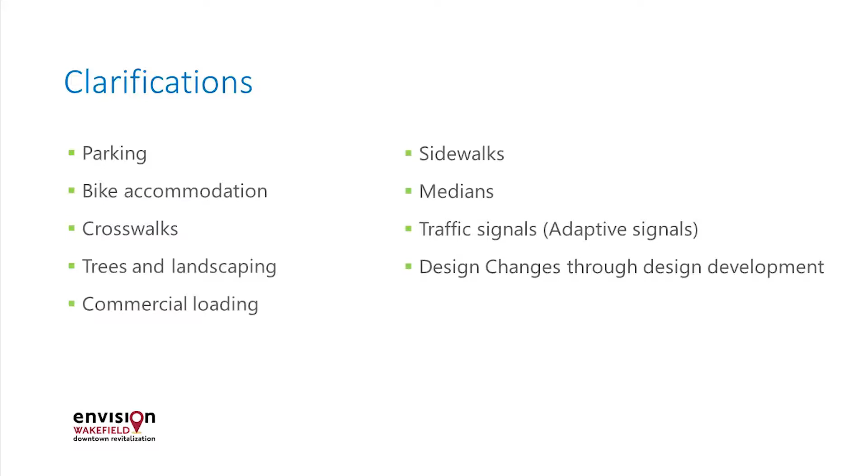We also wanted to update folks in terms of crosswalks. I think there was a little bit of a misconception about the idea of having the wide crosswalks that are out there today. In many of the locations, we're actually shrinking the size of those down to make it much safer for the pedestrians as well.

Trees and landscaping, again, this is very conceptual, but we've actually gone through the plans. I think that we're working really hard to keep as many of the existing trees out there as well, so it's not going to be a clear cut of the trees, as many people I think had thought along the way.

Commercial loading and unloading, if you think about all the businesses up and down Main Street, we've had a couple of conversations with the business owners. That detailed analysis about where loading bays would be and parking spaces for trucks and so forth, that really comes in the next round of the design process. But we're going to be working closely with the businesses to figure that out in much more greater detail.

Sidewalks, a little bit of misconception there about are we basically taking out all the sidewalks and making all of them smaller? Actually, in many cases, we're making them wider and be able to accommodate a whole range of uses that we'll show you in the videos as well.

There was a little bit of misconception about medians, thinking that we're actually not providing any. We've actually increased 3 or 4 of the medians going up and down the corridor, and we'll show you those in the videos. And then wanting to make sure that beyond the physical improvements that you might see in the sidewalk and the curb cuts and the aesthetics, that the traffic signals and operations, especially along Water Street, are really going to be enhanced to deal with the flow of cars coming through this whole area.

And then really talk about the design changes, because we've heard a lot over the last few months. You might see a lot of the same drawings tonight. That's actually intentional because we're gearing up towards making a whole series of changes. And tonight we really want to hear from you about other input items that we should be thinking about as we further advance the design.

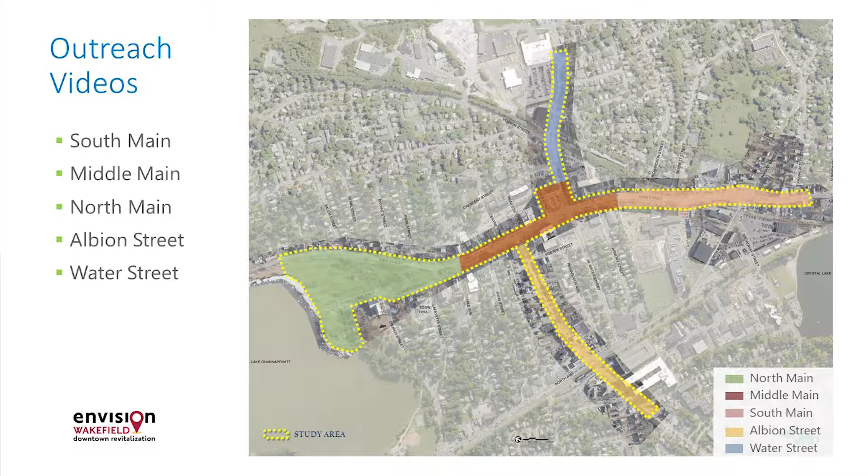Sure. So the study area, does everyone understand the graphic? It's very colorful. This is the junction right here, this is North Ave and Nahant Street. This is Main Street. So Main Street, the project starts at Franklin Street, this is the Dunkin' Donuts. Goes along Main Street up to Water Street. It extends up Water Street beyond Vernon Street to the Shaw's driveway. Along Main Street, it goes and continues up to Salem Street, which is about right here, and also Albion Street, which is down here. It goes to Gould Street. This also includes some of Church Street, some of Common Street, and then Lake Ave and Spaulding Street.

So just as they're doing their thing, I just wanted to really reiterate the number of meetings that have been happening so far with this project. The focus group meetings were meetings that we held every Friday morning, every other week for a couple months. So there was about 8 meetings. And the focus group, there were representatives that represented different people along the Main Street corridor and Albion Street, like the Friends of Lake Quannapowitt, the senior center folks, the DPW and the emergency folks. So there was everyone that actually gave their input on the design development. We would throw out an idea and we would get their input. It was terrific.

The public meetings, this is the 4th one that we've had so far. And to be honest, there were about 16 meetings as part of the public outreach and the public process for this project, which is really interesting because we started about January 1st. So there was a lot of work done with public outreach for this project. It really is outstanding how much the town has tried to be transparent. All of the media that you see tonight, except the blank screen, is on the town website. And also all of the information presented at all of the other 16 meetings is also on the town website under the Complete Streets web page.

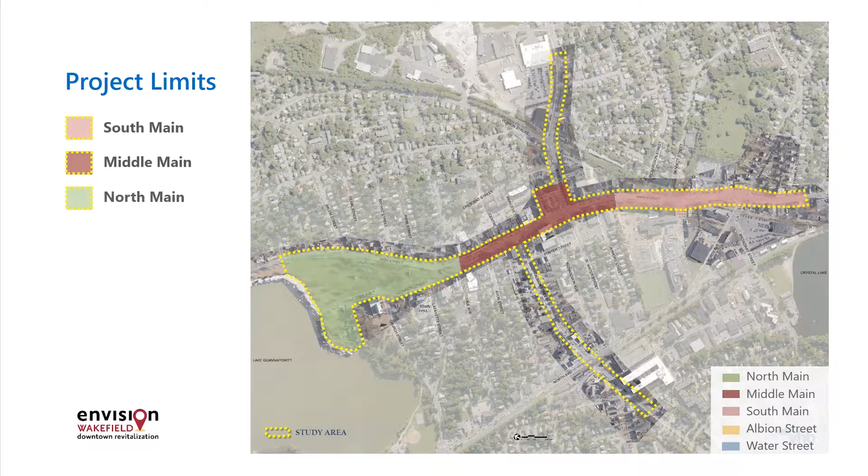The town of Wakefield is excited to share the conceptual streetscape and roadway vision for the heart of our downtown. Working closely with stakeholders, businesses, and residents at a series of community forums, conceptual plans have been created for South Main, Middle Main, North Main, Albion, and Water Streets. Keep in mind that these designs are a framework, think of them as the bones of the project. As the design process continues, elements like sidewalk and roadway materials, types and styles of lighting, placement of bus stops, and other details will be determined.

This is the southern end of the scope of the Downtown Revitalization Project. We have the intersection of Main, North, and Nahant on our right, the Galvin Middle School in the center, and the intersection with Water as you travel north.

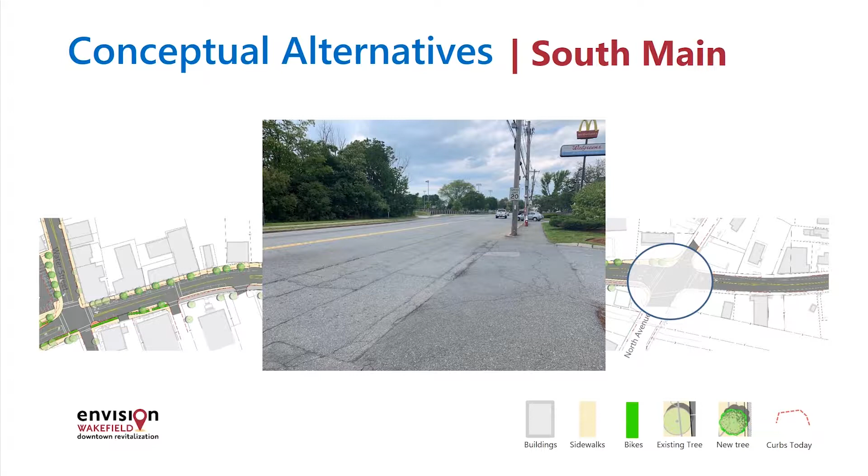Many residents commented that the Nahant Street intersection was the gateway to downtown, but that it currently lacks the character one expects when they come to Wakefield. There's an opportunity not only to improve the geometry of the intersection, but also introduce choice plantings, lighting, and streetscape elements to beautify the area. Those types of selections will be made in the next phase of design.

Throughout the feedback process, residents have been clear that the safety of the middle school students is a top priority. Over the most recent 3-year period, a total of 41 crashes occurred along this section of Main, with 3 crashes involving a parked vehicle and 1 crash involving a cyclist.

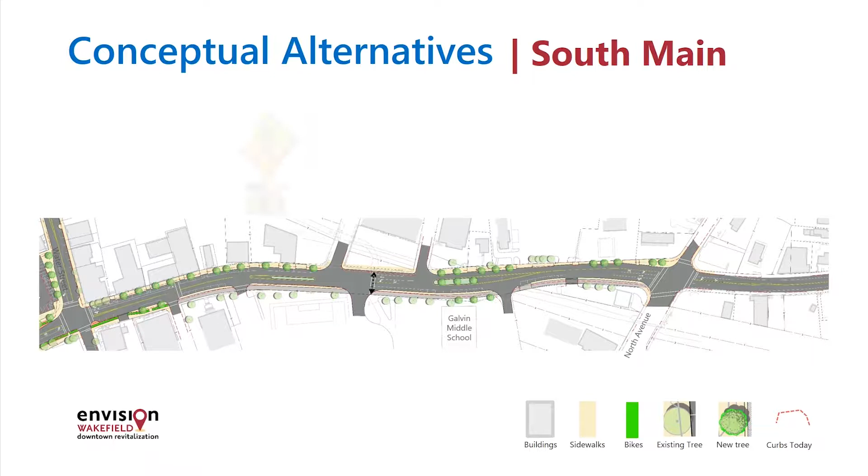With safety in mind, this plan proposes extending the sidewalks here and introducing medians. The medians would be designed to reduce the wide pavement area in front of the school and add more green space to make it more appealing. This concept also shows 2 crosswalks that could be installed with rapid rectangular flashing beacons that would alert oncoming traffic when their buttons are pushed.

An exciting development in this section of Main Street is the Wakefield-Lynnfield Rail Trail, which will begin in the area of Richardson Street. A small parking lot will be created there as part of that separate project. It's important to envision the future of this area and how it will be used. In this design, a separated shared-use path would be installed along the middle school so that cyclists can travel off-road to North Ave. Providing a shared-use path for cyclists can reduce conflicts between vehicles and bikes, improving safety for all roadway users. The path would be 10 feet wide, the same width as the rail trail, and would function the same way, providing access for walkers and bikers.

North of the middle school, a separated bike lane is proposed on the west side for bikers traveling south, and a bike lane on the east side for bikers traveling north. A bike lane is proposed for this short stretch of Main Street because of the needed right turn lane going onto Water.

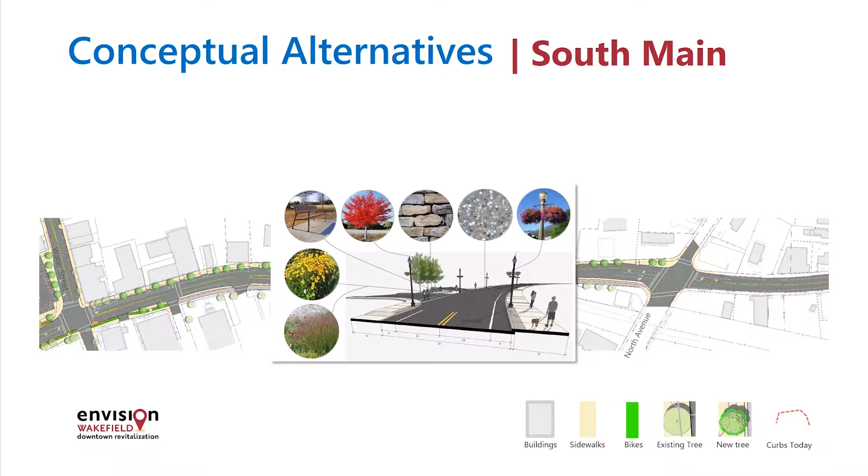Sidewalks on either side could be reconstructed with new materials, streetscape elements, and street trees. These selections would be made in the next phase of design.

A traffic study found that the angled parking at the intersection of Main and Water is often used as an illegal traffic lane for drivers looking to avoid traffic stacking on Main Street and turn right onto Water. The design suggests that these spaces become parallel spaces for that reason.

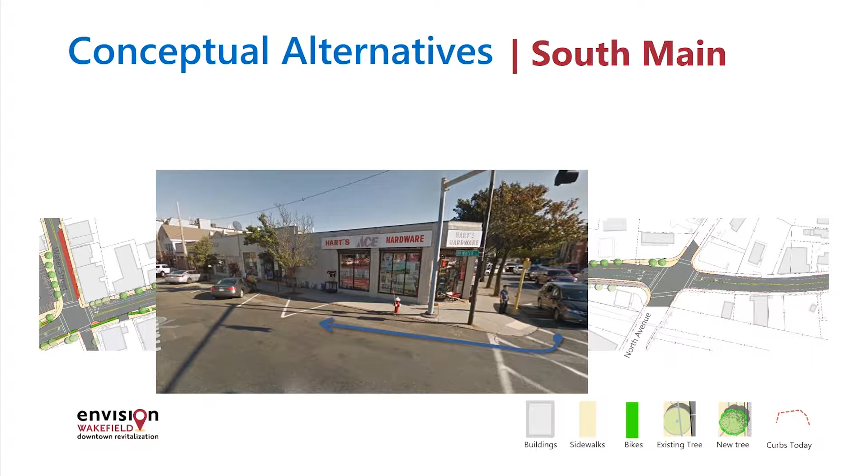The angled parking as one makes the turn from Main onto Water Street caused multiple crashes over the past several years due to cars backing out of the spaces without a proper sight line into oncoming vehicles. To minimize the hazard, these spaces would be converted to parallel spaces. However, a reconfiguration of the lot across the street would compensate for the loss of Water Street's angled parking.

Let's look at it more closely. The red dotted lines you see are existing curb lines. Some of the parking spaces and parking aisles within the lot today are substandard.

With the reconfiguration, you'll notice many changes here and an adjustment of the traffic flow on Smith and Lincoln Streets. This plan would not only improve circulation, but potentially improve safety within the parking lot. The new configuration would also provide additional spaces, resulting in a net gain of 2 spaces over what exists in this area now.

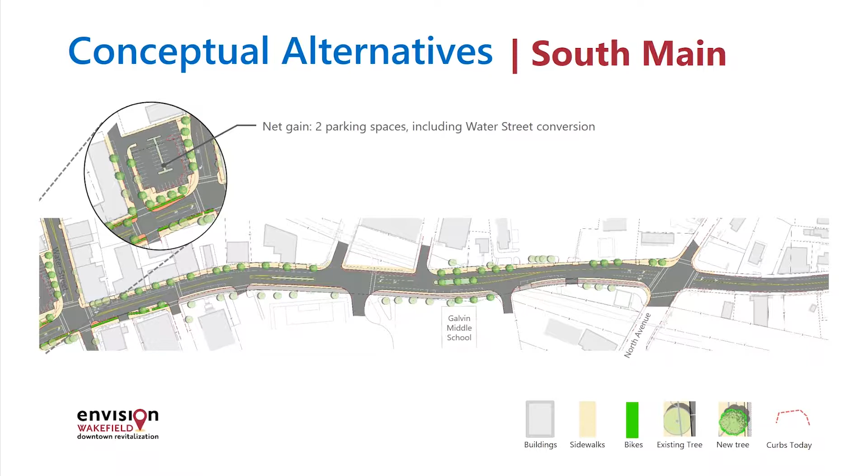One of the things that we did here was add medians, or rather, we were thinking about actually reducing the amount of pavement out there. Just to reiterate, there is a median that's going to be landscaped right at the middle school, and also a smaller median that's going to reduce the amount of pavement that's out on Main Street.

You are currently looking at Middle Main Street. Just to orient you, on the right side of your screen is the intersection of Main and Water. This is the Smith Street, Water Street parking lot. Continuing northbound, you'll see the hiker statue and rockery across from Crescent Street, and further north beyond this graphic, you'll be at the lake.

Part of the design process is planning for the future of our downtown and conceptualizing how it could be used. As you may know, the Wakefield-Lynnfield Rail Trail, which is a separate project, will begin just south of here across from the Galvin School. It will cross Water Street at its intersection with Vernon. This will bring many modes of transportation to the area, and this project looks to accommodate all of them safely.

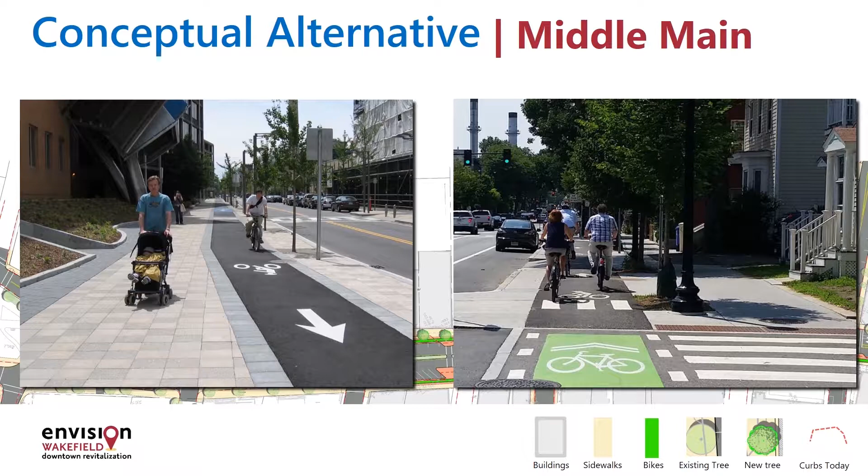On this concept for Middle Main, the lime green strips indicate where separated bike lanes could be located. They'd be at the level of the sidewalk, away from the roadway and parking stall, and also adequately separated from the sidewalk itself. Here are examples of how other communities incorporated this type of lane.

As the road tightens here, the current angled parking would need to be replaced with parallel spaces. Understanding the importance of parking on Main Street, we could make up for lost spaces on Center Street and Princess Street. By widening each road slightly and making them one way from Main to Union, it would create a loop. This would allow parking spaces to be created on each side of both roads.

This adjustment would not only make up for spaces on Main Street, but may result in a net gain of 2 to 11 spaces over what is present today, just in this specific area. The directions shown here are just concepts. Again, these are fluid, and the design is a dynamic process. The exact parking count would be determined when the plans are further along in design development.

You'll notice that angled parking is maintained elsewhere on Main Street, and keep in mind that angled parking could be added where it does not exist today further north. You'll hear more about that in the North Main video.

This project also envisions a better experience for our pedestrians and ensuring accessibility for all. You'll notice red dotted lines throughout the design; these show where today's curb lines are. Many residents shared their opinions that crossing Main Street was very difficult and not all crosswalks were accessible to individuals with disabilities.

From 2014 to 2016, 62 crashes occurred along Main Street between Crescent and Water. 10 of those crashes involved vehicles backing out of angled parking spots, and 7 were pedestrian-related crashes.

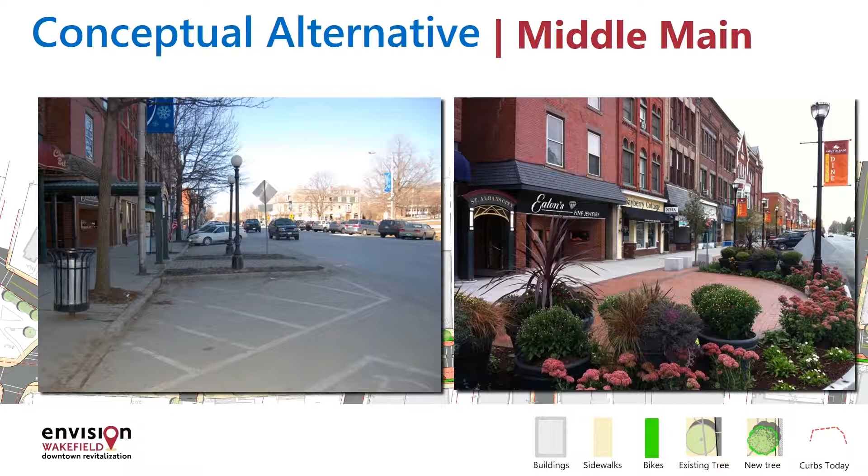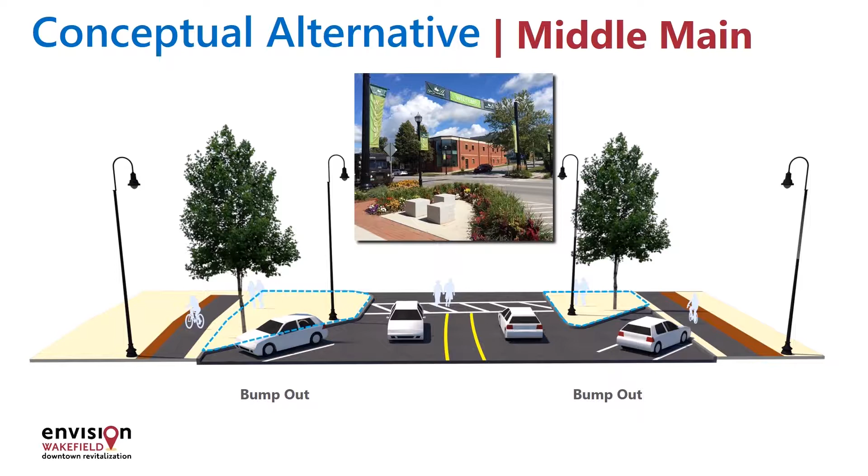Let's look at a cross-section view of the area highlighted in red. You'll see the sidewalks and sidewalk-level bike lanes, the bump outs, the angled parking featured in this area, travel lanes, and the tightened sidewalk. We'll discuss the Water Street parking lot in our South Main segment and changes to Common Street in the North Main segment.

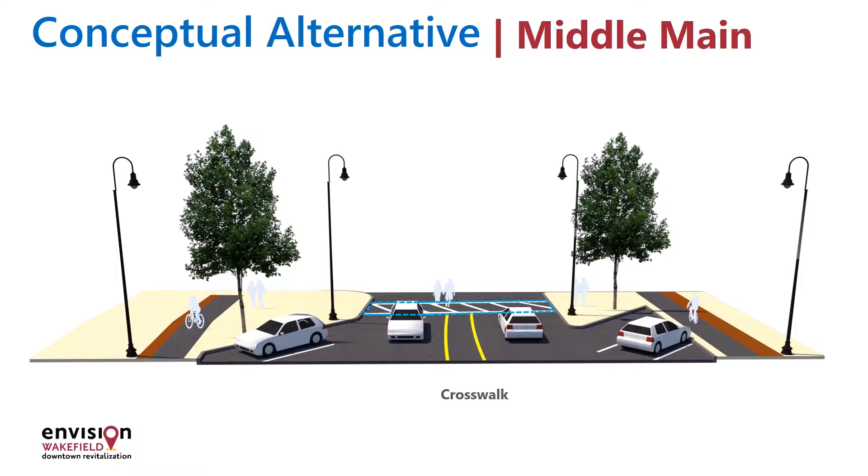So, questions or comments about the Middle Main section as we're bringing up the illustrative plan from a few seconds ago in the video? Can you go back to the plan? Go back to the plan. Yep. Yes, sir.

That's good. When I go to some of them, you have to back angle up. It seems like a much safer way to do it. Have you considered that? We're evaluating the use of reverse angled parking as part of this, yes. We originally thought of it. I think that was considered a number of years ago in Wakefield, and at that time, it wasn't really favorable. So we are reevaluating that right now.

In Somerville, and in other communities in this area, they use reverse angle parking. So instead of doing head-in parking with angled, they actually go beyond the parking stall and then back in. And has that been considered as part of this design? As I had mentioned, we're going to evaluate that to see what that looks like on this section.

Great. Let's go up in the front here. Yep. Hold on one second. I will bring the mic over. That way we can hear everybody and not have to repeat the questions. Excellent.

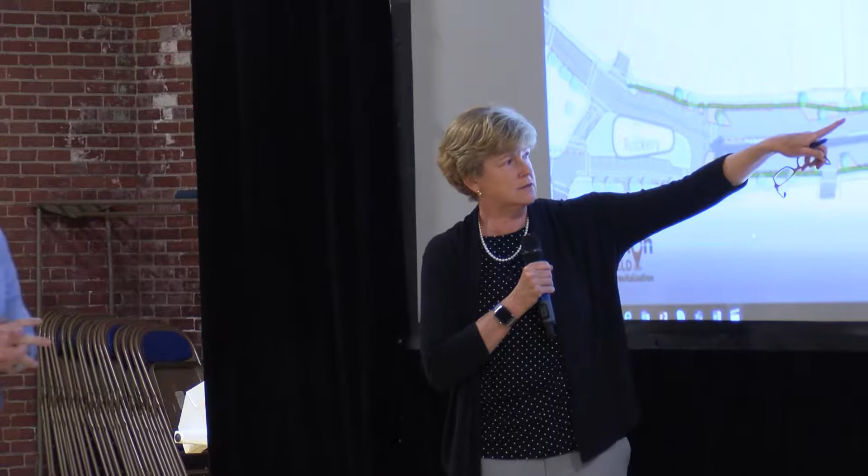So is this the area you're talking about, correct? On this side. Actually, you're gaining sidewalk. So right here is the existing edge, here.

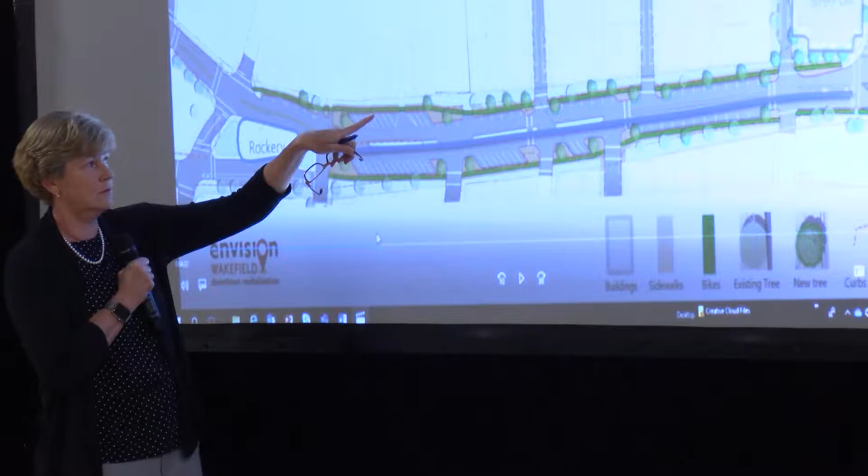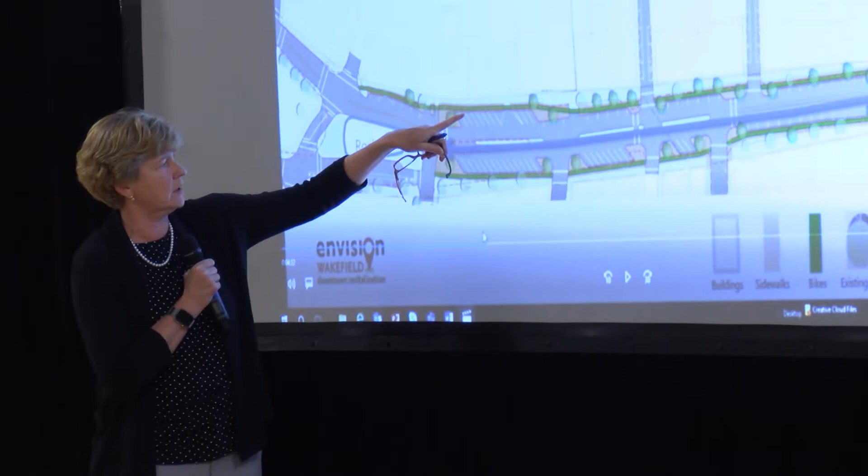So the dashed line is right where the angled parking, the edge of the angled parking, is — that's what we're proposing, right? The separated bike lane, as they call it, is 5 feet. So that's what you'd be losing, 5 feet.

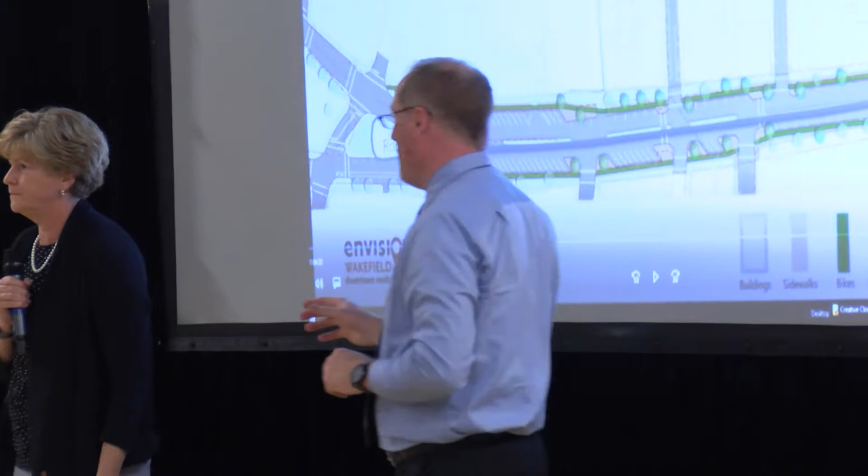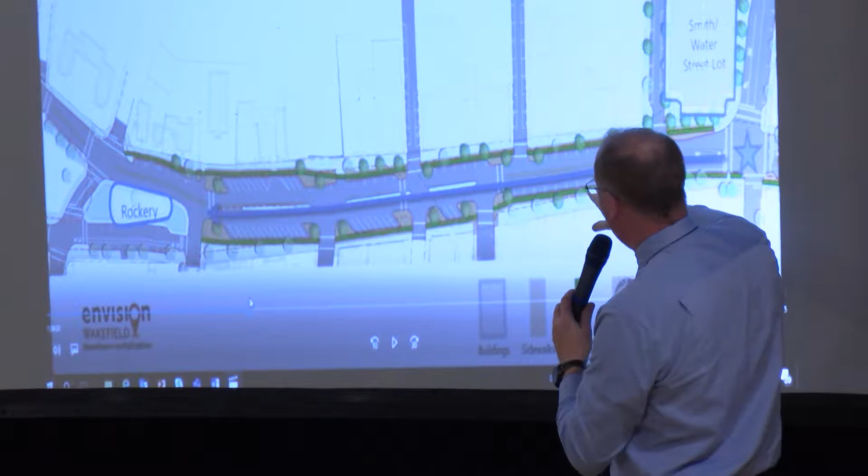I think one interesting opportunity we saw, because of how the whole Main Street area historically came to life, is that if you look at the width of Main Street down here, it's narrower than up towards the Rockery. So with our design hats on, that told us if you're trying to preserve the width of the sidewalks, put in the bike lanes, put in the angled parking, and maybe get a median, there wasn't enough room to fit everything.

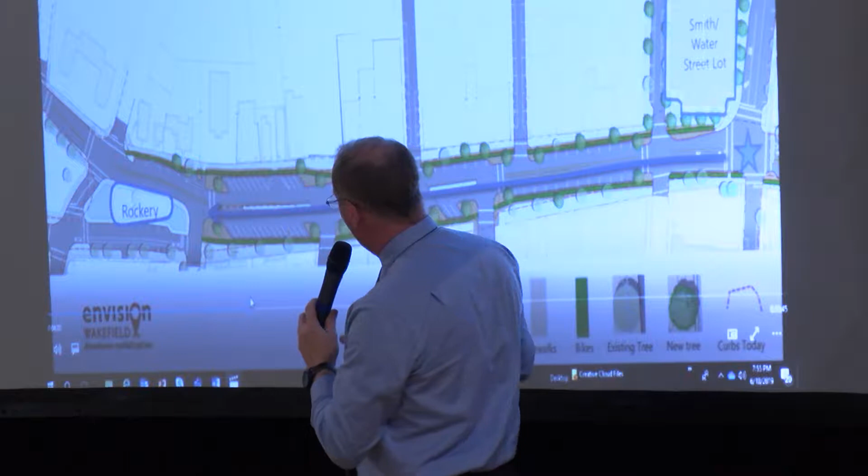As we go further north, we were able to extend the medians — you only have the one now, we've introduced a couple others — while trying to get the geometry of the bike lanes in and maximize the angle parking. There are actually parts of the plan where we've widened the sidewalk. I can imagine these spaces, and some of these bump outs in certain locations, could offer more pedestrian space and activity than what you have right now.

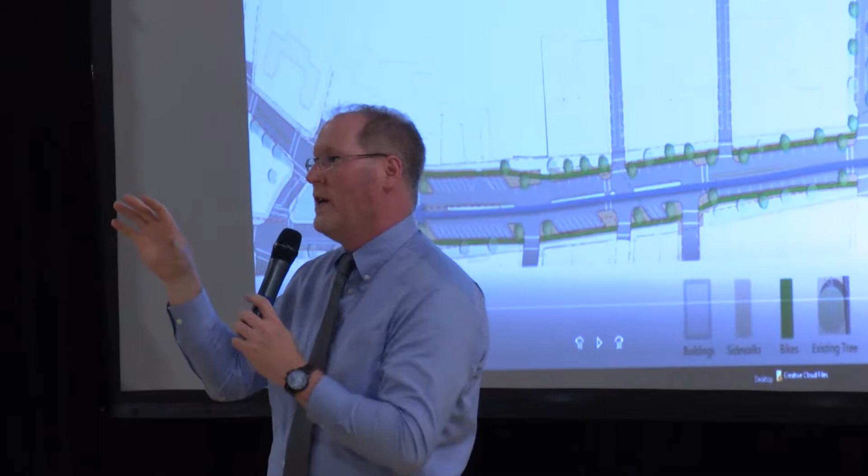When we showed you some of those photos from other places, we've yet to design what those can look and feel like — imagine outdoor dining, areas for festivals and activities. There are spaces in this plan where pedestrian activity is even increased from what's out there today. Just wanted to clarify that as well. Yep, let's go back here.

Elena Perry-Casellas: I'm a big supporter of the separated bike lanes, but I'm curious, now that the bikes are moved to behind the parking, at each of the side streets where the bikes are crossing and the crosswalks are crossing - two questions. One, is there a designated area for the bikes to cross and then the pedestrians to cross separately? And two, is the expectation that cyclists stop at each of those and look for cars, because cars are no longer going to be aware that someone's been riding beside them down Main Street?

I think it's a case-by-case condition. We would likely stop the bikes on the bike lanes at the crossing streets, but it really depends on how it's being used right now. And what was the second question? The crosswalks - the pedestrian crossing on the side streets is separated from the bike lane crossings.

You're looking at the northern section of Main Street. Here's the Hiker and Rockery Monument, and this is Common Street as you head north toward the lake. An adjustment of traffic flow and reconfiguration of the lane on Common Street could result in the addition of angled parking where it does not exist today.

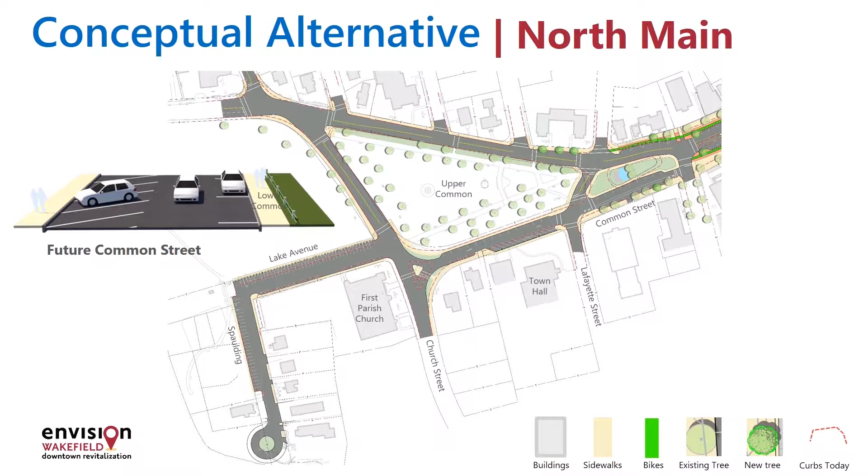Increasing accessibility and creating a safe space for all modes of transportation, vehicular and pedestrian, is a big component of these concepts. A sidewalk could be added along the upper common side so that those who park wouldn't bump their doors against the fence, and could travel safely on a crosswalk once they exit their vehicles. The angled parking and painted spaces along Common Street would result in 11 new spaces here.

You'll see red dotted lines on these plans indicating where today's curb lines are - especially obvious here by the Rockery Monument. Today this area is not accessible; there are no crosswalks, and the perimeter is extremely narrow. This design extends the green space and adds sidewalks while preserving the monument itself.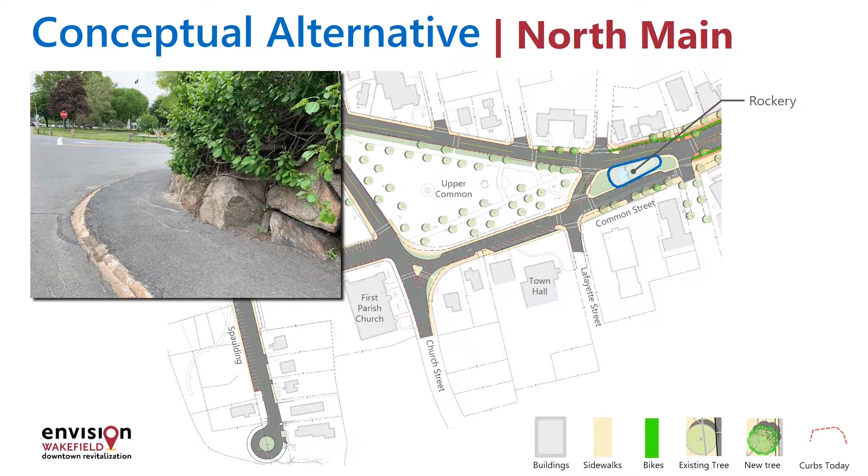This not only allows a greater pedestrian experience and brings the area up to standards set by the Americans with Disabilities Act, but the geometry of the intersection could be improved, easing traffic flow in an area of Main Street that's confusing to many motorists now. Emergency response vehicles would not be impacted by the proposed roadway configuration.

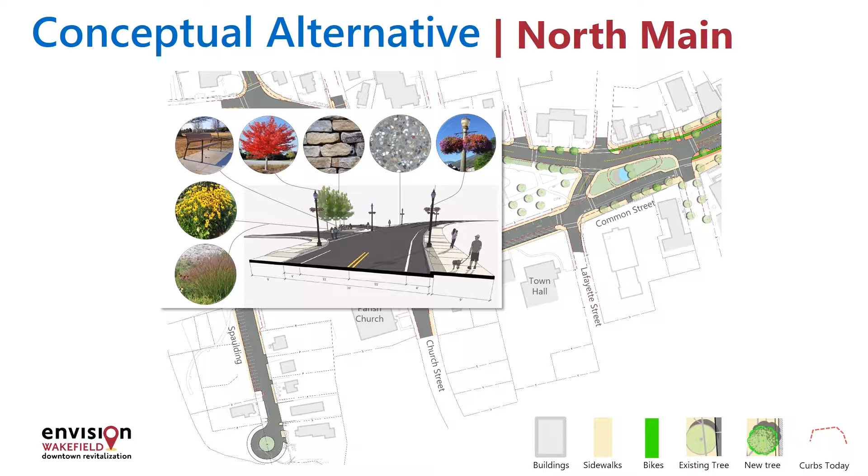The goal of this project is not just to improve the roadways themselves, but also to imagine possibilities for the future. Ideas within this area include the option to close Common Street for a special event or utilize the extended space for a pedestrian plaza. Choices for roadway and sidewalk materials, lighting styles, and other details would be determined in the next phase of design. A few other important points to note on this concept.

First, the geometry of the Salem Street intersection could be modified to make pedestrian crossings safer and slow turning vehicles.

The signal itself could also be updated to take advantage of new signaling technology. The Church Street intersection could also be improved to increase the safety and accessibility for pedestrians.

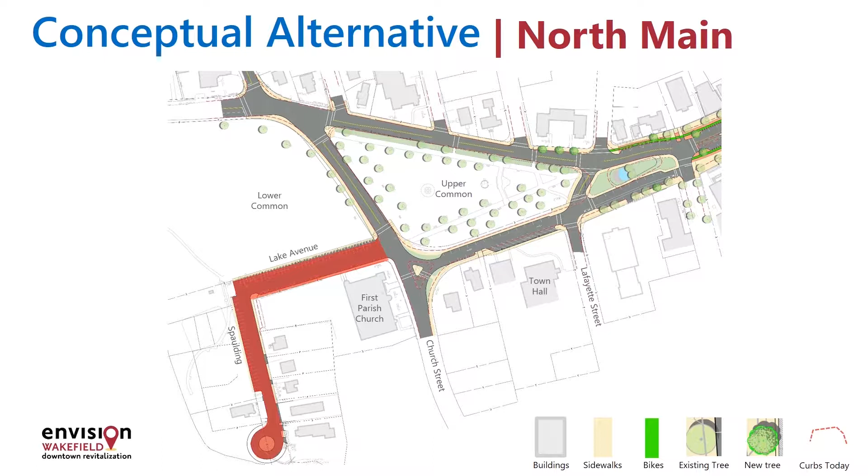Lake Ave and Spaulding Street are at the northern section of our downtown, close to the lake. Today, parking on Lake Ave is angled. When a vehicle leaves one of these angled spots, it needs to continue northbound and turn around on Spaulding Street.

By reconfiguring the land on this roadway, perpendicular parking could be created, as could sidewalks on both sides of the street. Perpendicular parking still allows a car to pull in easily, but upon exit, the driver would simply back up and turn in the preferred direction.

In addition, this concept proposes adding parking along the westerly edge of Spaulding Street. 16 spaces are created with the parking stall reconfiguration.

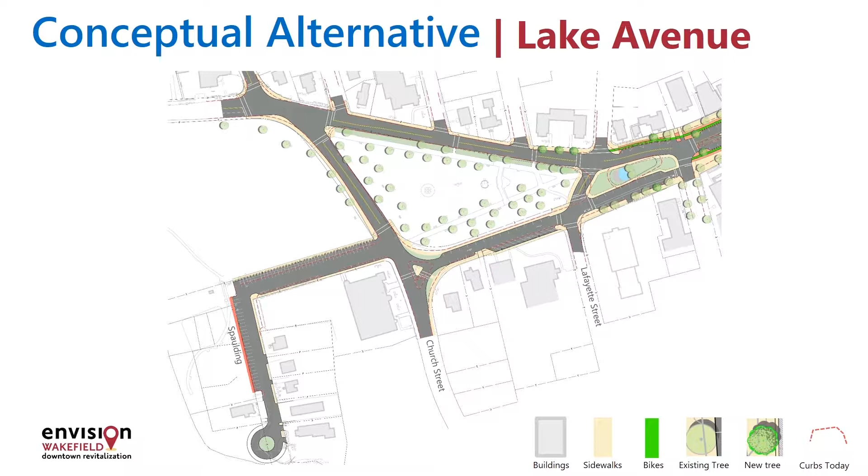We will be able to add sidewalks to Spaulding Street for safety, introduce pedestrian scale lighting, and better define the cul-de-sac at the end of the road. The center of the cul-de-sac could be designed for green infrastructure, which would filter the roadway runoff before it flows into the lake.

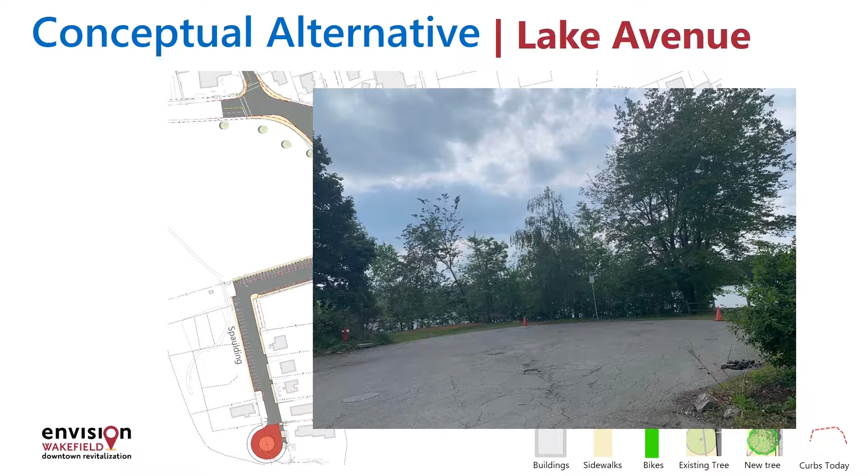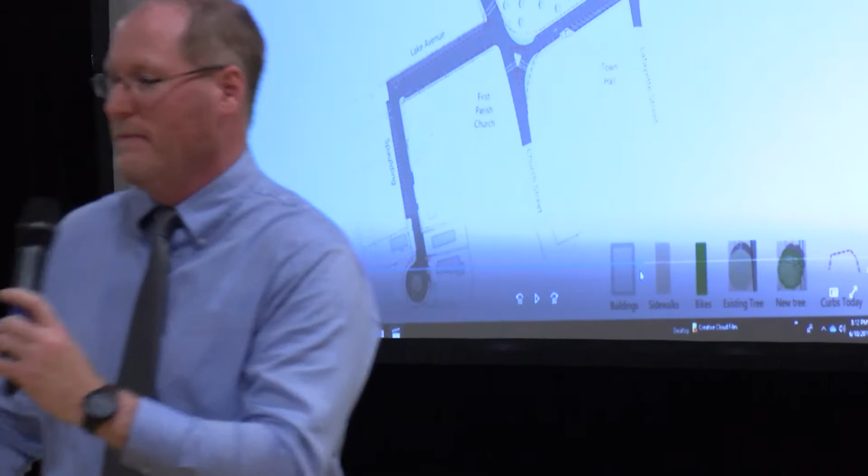Elsa, if you can back it up towards the illustrative plan in that area too, and then we'll open up some questions and comments in this area. So yeah, we'll go here and then in the back. Looking at the Lake Avenue area, did I see some of the lower common green space being taken up by that?

No, just the opposite, actually. So we're talking about Lake Ave, Trish, where we're going a little bit into the...

Yeah, so let me try to help clarify. So on the plan here, we have this red dashed line that shows up here. That's probably maybe 10 feet. To be able to move that back by 10 feet, we'd be able to change the angled parking to perpendicular. That's what helps let us gain extra spaces along that edge there. So yes, it would be redefining that slight edge of the common in that location.

The question is, how many square feet of current green space does this proposal include that would be removed from either the Lake Avenue side or the rotary at the Spaulding Street? Would there be any green space eliminated from our current parklands?

Thank you. Yeah, so I think there's a slight shift, again, where that red dashed line by about 8 to 10 feet in towards the park, just for the length of where you see the words Lake Avenue there to be able to make that happen along that edge. So I don't have the square footage number, but it'd be along the length of Lake Avenue for about 10 feet. And the other end, I don't know that we have square footage or anything related to the cul-de-sac itself.

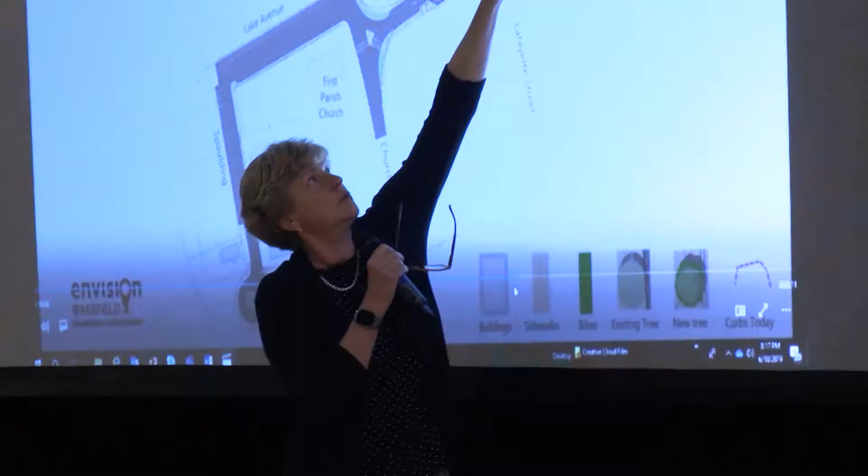It's going to be easier if I point to it instead of using the pointer. Right now the Rockery is just that oblong shape, so it has a really wide area in front of it, and people jockey for position, and it's really difficult to move. So what we've done is, this is Lafayette Street.

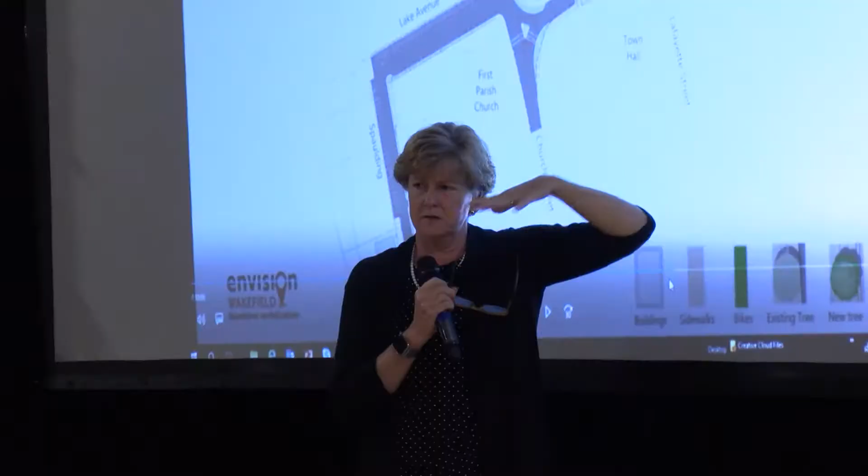We've better defined the intersection of Main Street with Yale Street, so people coming out Yale will have to stop before they get on Main Street. Common Street will be going southbound, so this is two-way traffic right now, and I think right now people actually shoot across here since there's no pavement markings. It's just a pretty wide open area of pavement. So what we're doing is narrowing it and making a real intersection.

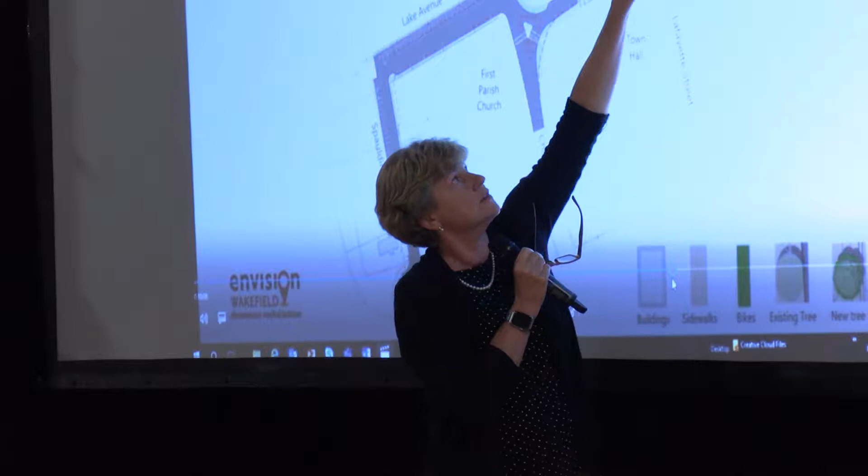Common Street is coming southbound and will continue southbound, but it's going to be a formalized intersection with Lafayette going away, Common Street going southbound, and that's Church Street, which is going to be two-way. So people coming on Common Street will go up Church Street to get onto Main Street instead of going straight across, though they can go straight also. So it's going to be a little bit different configuration.

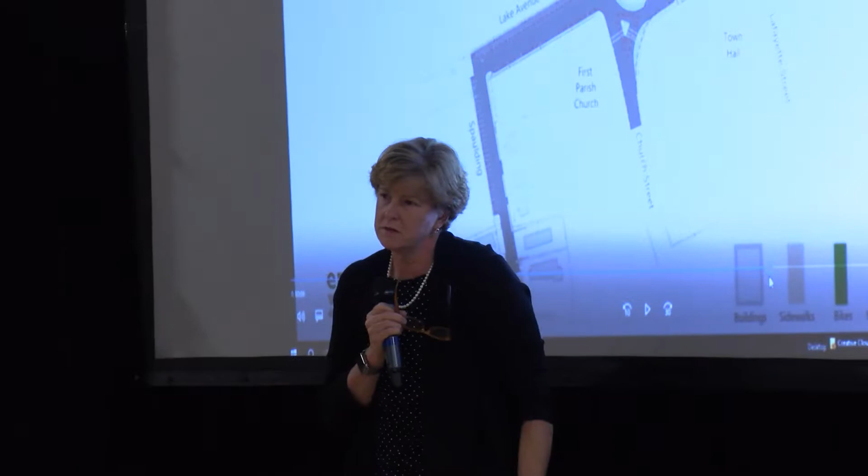Did that make sense? Yeah, is that one section of Common Street then? Yes, both sections. This one will be one way and this one will be one way, with parking on both sides here, parking on both sides here, with one side being angled parking.

One of the other quick benefits of these roadway alignments in that area is this section of Common Street being one way, as Trish just mentioned. Not only does it help us with parking in this area, it also lets us neck down and introduce crosswalks on the north and south sides, and rethink the northern and southerly edges of the Rockery. As the video mentioned, as people are coming down here, we can have two-way traffic onto Main Street as you're heading south. We can actually close off that entire section of Common Street for special events and celebrations, so the whole community could be connected to the Common during special events. It gives a lot of flexibility in that section as well.

I have a few questions. On Lake Ave, is parking only going to be on one side? Parking's on both sides. It's going to be on both sides, okay.

As far as the cul-de-sac at the end, there won't be any parking there? No, there will not be any parking there. Good.

I'm going to bring this up, Steve. One of the things we observed with both Lake Ave and Spaulding is that people use the edges so much that front yards are getting eroded out and worn. Yeah, that's my front yard. So what we're going to do is put a curb there and then grade back your front yard so it'll be grass up to the curb or to the sidewalk, depending on what side of Spaulding you're on, and on Lake, on both sides, there'll be sidewalks.

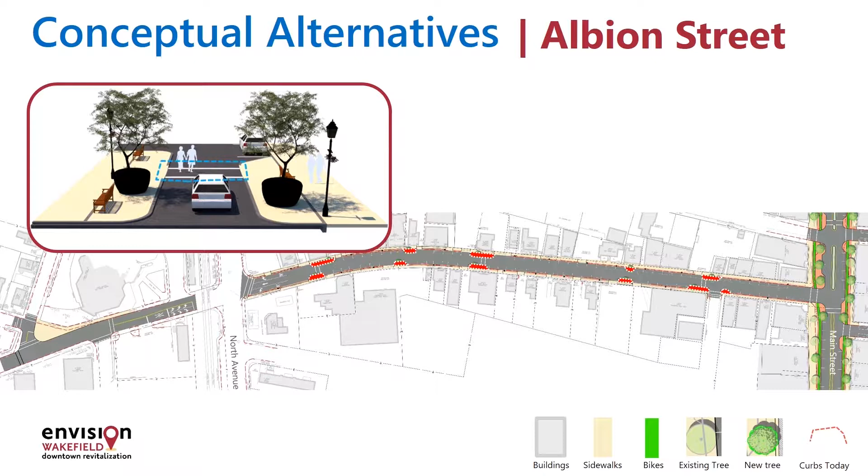The bump-outs also help with pedestrian visibility at crosswalk locations and limit folks who park illegally at side streets or block driveways along Albion. Further west, Albion crosses North Ave.

To help pedestrians cross North Ave, the pedestrian signals and push buttons could be upgraded. West of North Ave, Albion intersects with Gould and Murray Streets.

This intersection currently has a lot of pavement and no markings to help vehicles and pedestrians navigate through it. One idea is to better define the intersection by narrowing it.

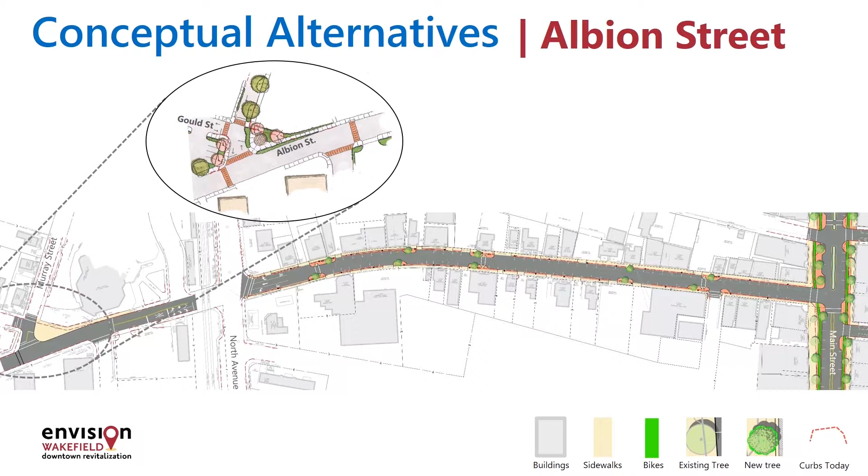This intersection proposal would not impact the accessibility of emergency vehicles, but would open up the space to use for plantings or a small park feature. Again, these concepts are fluid, and those details would be identified in the next phase of design.

We'll pause it there, and if Elsa, if you could bring up the illustrative plan. So, questions or comments about Albion Street?

I think one of our observations when we first walked down the corridor was how great of a street that already is in terms of the arts and culture and the small-scale shops that are out there today. And as I think you saw in the video, we're thinking about some really targeted improvements that can really bring that further to life in certain specific locations with these bump outs and some of those opportunities, especially out towards the end as well. So, questions or comments about Albion Street?

Okay, a little bit more straightforward. Oh, yep.

So the question was, will there be any tree planting? Yes is the short answer. Where we have those bump outs in particular, one of the things that we found was not only does it shorten the width of those crosswalks that don't exist and introducing them, but also gives the ability to put some plantings in there and some benches. So when you think about walking down Albion Street today, there's no place where you could actually stop, sit on a bench, maybe enjoy some art. So planting for trees and some maybe flowers and benches. Short answer is yes.

Yep. Can you just expand on what the possibility is to improve the pedestrian signaling at North Avenue? Sure.

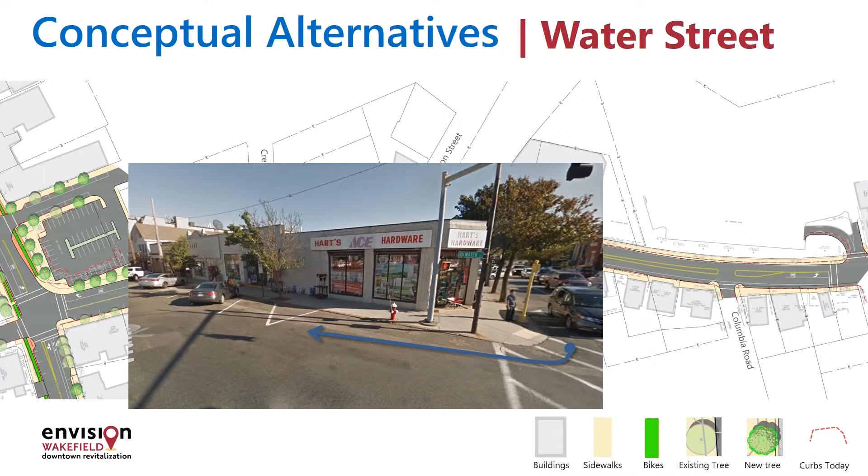As was reviewed in the South Main video, spaces lost here as a result of the conversion would be gained through a reconfiguration of the lot across the street.

An important lens during the conceptualization of these designs is planning for the future. As you may be aware, the Wakefield-Lynnfield rail trail will pass through this area. With that in mind, this plan proposes that the sidewalk along the north side of Water be widened as a shared-use path, allowing for the same type of facility as the rail trail. It would provide a safe connection between the rail trail and Main Street.

Traffic signal upgrades could include the use of adaptive signals at Main, Crescent, Vernon, and the Shaw's driveway. The signal design would use state-of-the-art software technology to adjust the timing and phases so that traffic gets processed on each approach more efficiently, which has the potential to reduce the number of rear-end crashes.

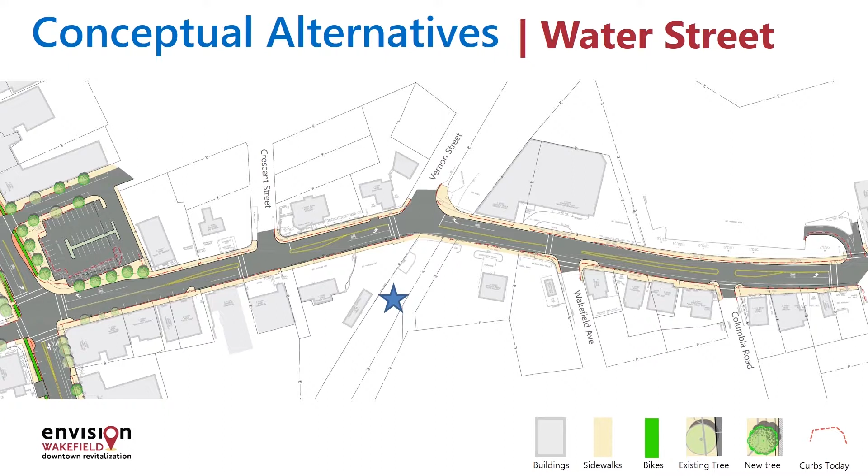The older signal equipment at Main, Crescent, and the Shaw's driveway could also be upgraded. The signal equipment and intersection changes at Vernon Street will be upgraded as part of the rail trail project, so changes there won't be added. The parking lot across from Vernon Street will also be paved and the stalls better defined as part of the rail trail project.

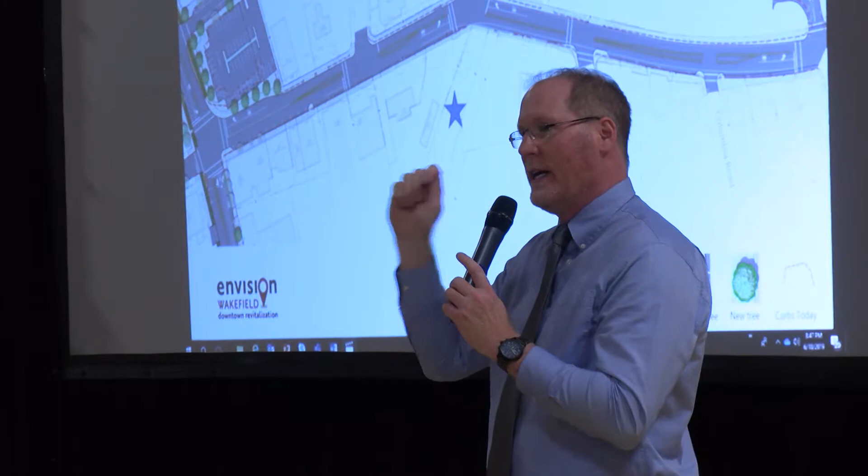Okay, are there other questions on Water Street? I think one of the interesting things to us here, like Albion, was that there was a limited amount of improvements here, but we worked hard on the upper part of the drawing here to extend that multi-purpose path to add more connectivity. So we think about where the rail trail comes in, getting people down towards Main Street. This idea of bike network is starting to really come to life in different parts of the plan as well. So that was kind of exciting for us.

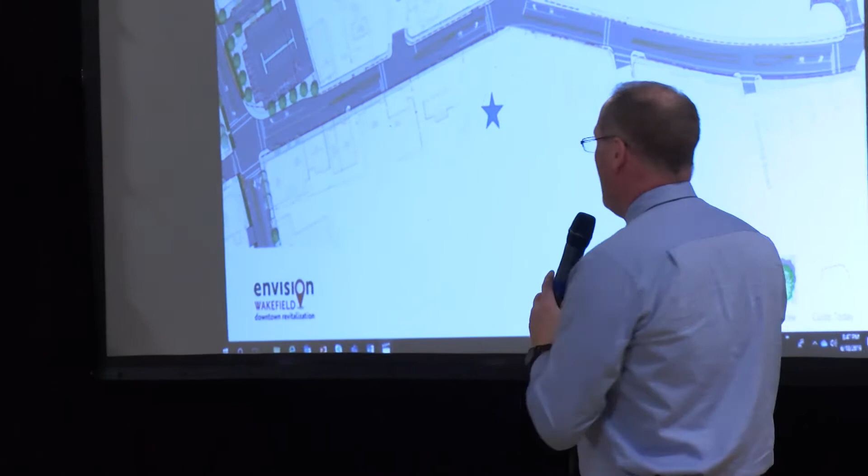So I'm going to switch us back over to the PowerPoint. We have like 4 or 5 slides that are really just about process moving forward, because I think it would be really helpful before folks leave tonight to know what's ahead of us over the next few weeks, and talk about what's on our homework list, our to-do list. You'll see a lot of detail that's going to have to go into this next round of study.

Great, or Elsa can do it for me. Fantastic, I'm glad there was no glitch in that part, right? So we had it up there for a second. This is teamwork in the making here. I think this projector is very finicky tonight as well.

Obviously many steps ahead of us, going from literally that blank sheet of paper to some initial ideas and concepts, a lot of conversations. Trish, do you want to mention some of the major ones that we're going to be going through here?

So we had a focus group meeting, I think it was the week before last, to just vet out some of the ideas that we are presenting to you tonight, and we got some great feedback. It was really terrific. We met with MassDOT. Some of the things you discussed tonight are among the comments, especially a parallel route for bikes. We did mention that to them. We presented the project and they were very receptive of it. They understand it, and they had some really good feedback and input on what the next steps would be. One of the things we are developing is the funding applications for the construction funding for the project, so we're in the process of doing that based on your input tonight.

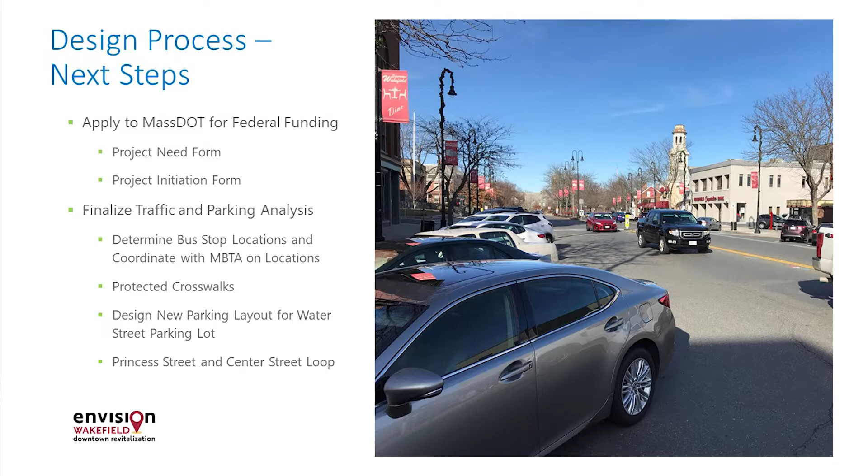Do you want to go into a little detail about what goes into the forms we have to fill out? Sure, I'll be quick on this. There are two different forms we're filling out. We completed the first one, which describes the vision for the town, including some specific data they've asked for. The next step, we submit it, they give us comments and feedback, and then we do a much larger application with all the backup associated with everything we've done so far for this project.

One of the things we heard a number of times was about bus stops - where are you going to put the new ones? That's part of the design process, figuring out the best locations based on ridership, where people are coming from and going to. We're evaluating that as part of design development, along with protected crosswalks. In one of the videos, especially near the middle school, you'll see protected crosswalks with wig-wag flashing when someone's in the crosswalk. We're going to evaluate to make sure those are the right spots, and see if there are other locations where it would make sense to add them.

The parking lot layout at the Water Street parking lot has some considerations we have to address - we have a few alternatives we're taking a look at right now. And for the Princess Street and Center Street loop, thank you very much for your feedback - there's a lot we have to look at in terms of widths, parking spaces, and how they're being used currently. There are municipal spaces, and spaces for police and fire on both roadways.

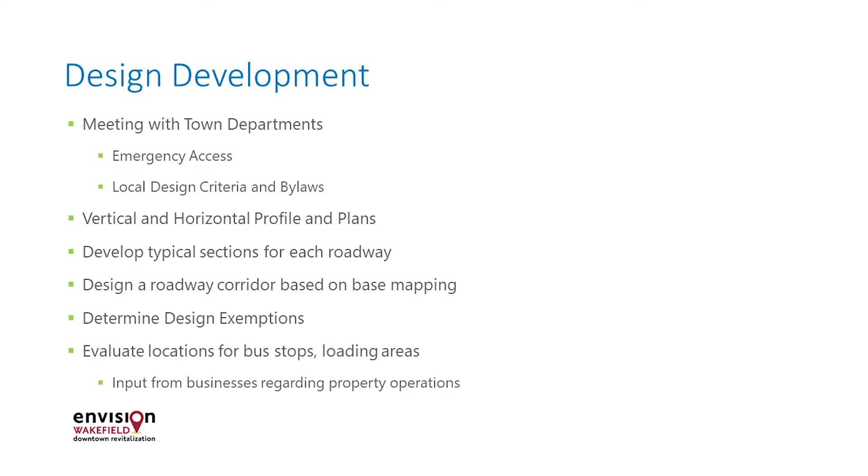So there's a number of things we're in the process of doing. We're constantly meeting with the town departments - DPW, the administrator's office, fire and police. We're going to make sure we adhere to everything Wakefield needs. I understand there's a federal process, but there's also a local process, and it's a local project, so we'll be designing this for the town of Wakefield.

We'll be looking at the vertical and horizontal design, how everything plays together. We want to make sure there's still access to all the buildings, that handicap spaces are in the appropriate spot with wheelchair ramps or pedestrian ramps, and that everything is ADA compliant. We'll develop cross-sections based on what comes out of this meeting tonight and the iterative process going forward, including design exceptions if needed for bus stop locations. We're also going to be meeting with businesses and property owners to make sure loading and unloading, commercial zones, and trash pickup are considered as part of the design development.

Utilities—you have a lot of utilities that are underground right now on Main Street, but there are other streets like Water Street where everything's overhead, so there's a lot of utility coordination that has to happen. Believe it or not, we design pavement, so it's not just putting on a new surface. We have to actually physically design it to make sure any issues with groundwater or the number of vehicles using the roadway are addressed as we develop pavement designs.

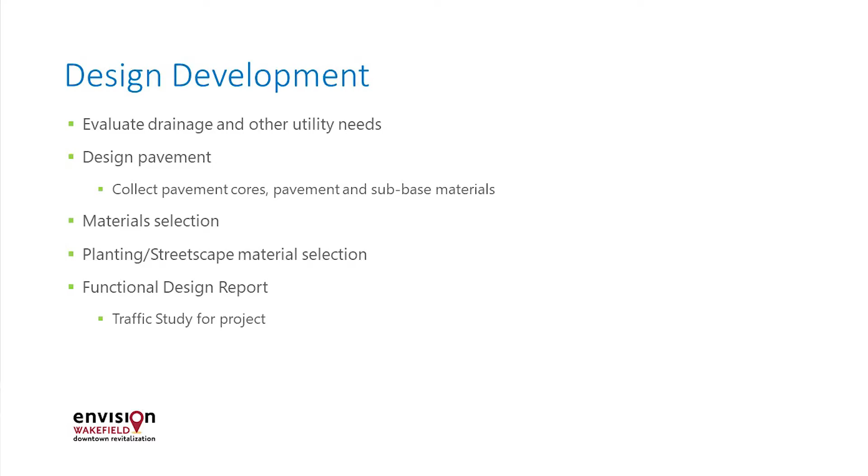The material selections, Jeffrey had gone over that a number of times. What's the icing on the cake? How are the sidewalks going to look, or where are features like bike racks going to be installed? And there's what's called a functional design report, essentially the traffic study—it looks at the multimodal component, crash data, existing conditions, and how people are circulating out there right now.

But wait, there's more, right? I'll just go over the highlights. So the traffic signals, especially on Water Street, have to be carefully considered, especially at North Ave, because a lot of people use that to get to the commuter rail, but also kids getting back and forth to the middle school. The pavement markings for parking and for vehicles—people driving down the street need pavement markings to understand where they're supposed to be and where they're not.

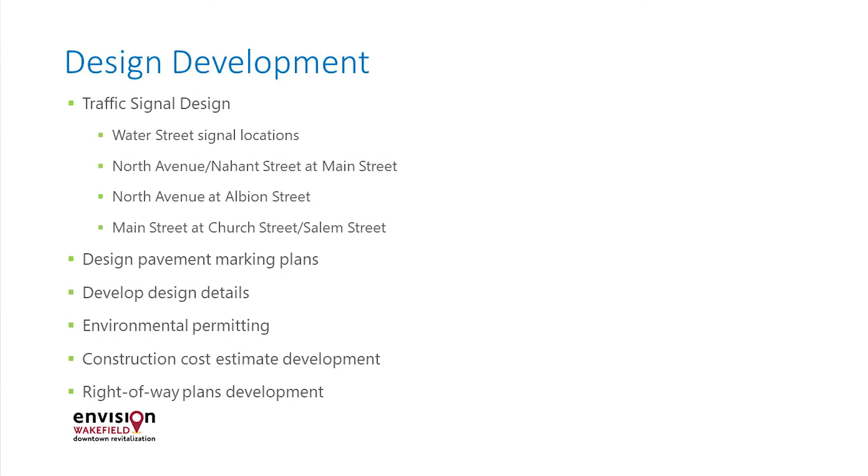All the design details, we have to design everything out. I know, it's crazy what we do. Environmental permitting, we have to do construction cost estimates, and if there's any implications to private property, we also have to take a look at that. So those are the next steps we have to take a look at.

And this is just a little flow chart, pretty much what I just said. So I think the important part here is we're really still at that very beginning phase. With all of that list of bullets, there's a lot of work that needs to be done, which will trigger different tweaks in addition to all the comments we got tonight. And I think what's important is the end game here is really getting to what we call 25% design, drawings, and plans. So imagine over the next few months, with all that work, we're still only at 25% design.

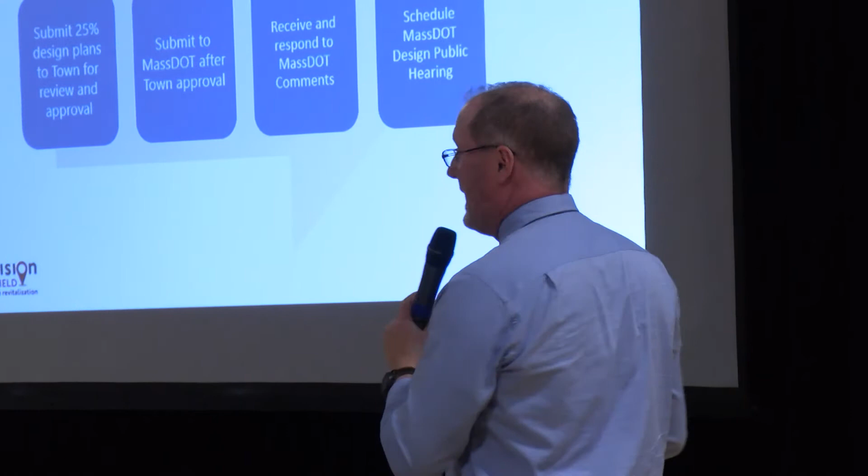We're going to be talking to the community several more times. MassDOT will have an official public design hearing once we submit those drawings, and they're going to give comments on this too. So we're really just at the tip of the iceberg here as well.

So I think that was it for us on our end. And as we started this evening, we really wanted to spend most of it reflecting upon the last four or five months, sharing with you some clarifications that were important, letting everyone know where there was a bit of misconception about things in the plan. Again, thank you to Jen for helping organize all of those videos—I think they're really helpful. All of those are available on the town's website, so if you want to share those with your neighbors, friends, or colleagues, they're all available there. I think they really help better describe what's in the plan itself.

And then keep in mind that we're about to make a whole series of changes too, so all of this feedback has been incredibly helpful to us, and we thank you for that along the way. So if you can help close us out tonight, that'd be great.